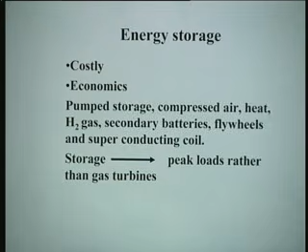And storage will come only during your peak loads, because at that time there may be a case where enough generation is not available. Sometimes using gas turbines may be a costlier option. I have already talked about gas turbines in an earlier lecture, and I told you why we need gas turbines. Though they are less efficient than a conventional steam power station, 30% as against 40%, they are quick starting. But here is a proposal that rather than starting a gas turbine, use your storage. The storage sometimes serves a better purpose to serve the peak loads rather than starting gas turbines. Of course, if you have both, you can always work out the economics.

Now, in case of secondary batteries, which is really the oldest way of storing energy, all your toys, your electronic goods, your transistors, 2-in-1s, Walkmans, calculators, everywhere you use batteries, and that is nothing but your energy source.

In fact, lead acid batteries were invented way back by a scientist called Plante in 1860, almost 30 years before electricity got generated in a bulk way by Edison, when the first bulb was lit. Electricity is a very old story. You must have known about ebonite glass rods and static electricity, you must have read it in your physics courses.

There are battery powered vehicles, I already talked about it. In our IDDC center, Professor Rukaswamy has done a lot of R&D on an electric bus. In fact, there is an electric bus service going on between Fatehpuri and Lal Killa, and that is just to make people aware how pollution can be avoided by using battery driven buses. So battery powered vehicles are available, they are running on the roads.

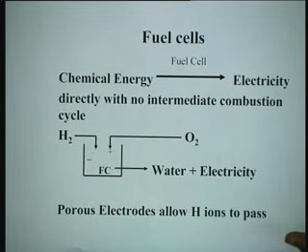Of course, fuel cells are costly, as I just mentioned. Anything in its initial years is always costly, but as time passes it becomes cheap. The same thing happened to color TV, the same thing happened to PC, the same is now happening to mobile phones. Even color prints, I remember when color photography came, used to be 7 rupees per copy, and now it must be very cheap.

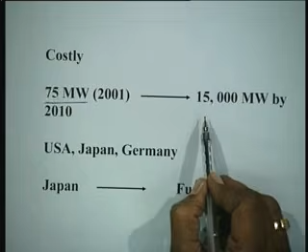Till 2001, the total power generated from fuel cells worldwide was just 75 megawatt, whereas it is envisaged it may become 15,000 megawatt by 2010. 2010 is not far off, and I am hoping that I will be around to see this 75 becoming 15,000 megawatt.

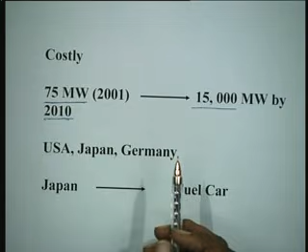These are the 3 countries in the world where fuel cell research is in the forefront, and hydrogen research also: Germany, Japan and USA. Barring Japan, there is no wind there, but US and Germany have wind as well, as I have been telling you earlier on.

Japan is the first to bring a fuel cell car, which I just told you about. We come back to hydrogen again. Hydrogen was used in fuel cells as well, as you have just seen. This is a medium for energy transmission and storage.

I was mentioning about the scooter. There are books on hydrogen in our center library. If you are getting interested in hydrogen, you can read them. At least there are books which contain a chapter on hydrogen energy that you can always use.

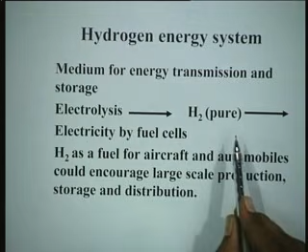Electrolysis will give you pure hydrogen, and of course fuel cells can be used. Hydrogen as a fuel is also used in aircraft and automobiles. I already told you about cars and scooters, and once it gets used, naturally it will prompt large scale production.

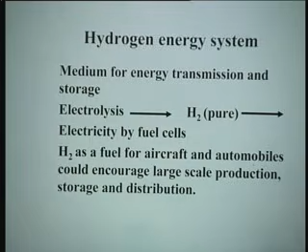There is a catch-22 situation here. Unless there is a use, nobody will produce, because it is a commercial venture. If you are producing something, it must get sold, otherwise why produce?

And there are problems of storage and distribution. You must have seen about LPG gas - if you do not handle it carefully, there have been explosions in various kitchens in the world, if it is leaking or not properly closed. So you have to be careful whether it is nuclear power, hydro power, or thermal power. There are precautions to be taken.

Now let us further study how the power systems grew in India, the growth of power systems in India. Of course, we are fairly rich in resources. You name a resource and it is available.

But the main problem is how to use them meaningfully, judiciously and optimally. You have talent, so where do you lack? You do not know how to channelize it, how to plan your things, how much you should study a particular subject, when you should study, whether you should get up early or work late at night. You have to plan your life. Every one of us plans our life.

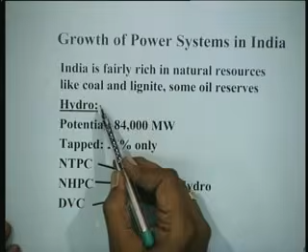As I already told you, the hydro potential in India is 84,000 megawatts. We could only tap 25% of it so far. There are reasons for that.

Now, the Government of India brought in the so-called Navratna public sector companies. NTPC, National Thermal Power Corporation, came in 1975. They used to employ at least 300 engineers in a year. I remember the interviews used to go on for a month in Nehru Place. Suddenly the requirement came down, and now it is looking up again, because we have to add 100,000 megawatts more. As I said, how do you add it if NTPC doesn't open new plants for power generation?

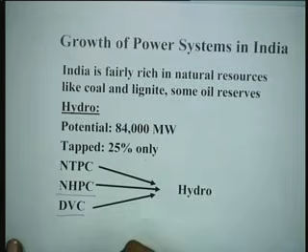Luckily, they have also entered hydro power in a big way now, so how long they can justify the name 'thermal' I do not know - it is no longer only thermal. Not forgetting that there is a separate corporation for hydro, NHPC, the National Hydro Power Corporation. Then there is DVC, Damodar Valley Corporation. Of course, Bhakra Authority is separate. All these are generating hydro power in our country.

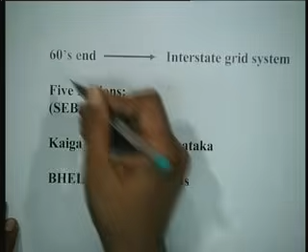I already told you that with freedom in 1947 we got only 1300 megawatt total installed capacity, which was nothing. Prior to that, during the British Raj, only a few pockets had electricity available, not much. With the first 5-year plan in '51, they started planning for generation, transmission and distribution. By the 1960s, say by 1970, the interstate grid system started. Till that time it was only state electricity boards - UP State Electricity Board, MP State Electricity Board - so power could not be given to a neighboring state even if you had surplus.

For long years Kerala used to have surplus power, because Kerala is a very small state and very rich in hydropower. If you travel in Kerala, you hardly find any space - there is water everywhere. So there is good irrigation, good water, and their economy is also good, because from every house someone is in the Middle East and someone is a nurse or in paramedical work. So they are all educated, 100% education.

So what does interstate grid mean? They can connect the states, and they produced 5 regions. Which were those 5 regions? I will just show you the map: NREB, SREB, WREB, Eastern Region Electricity Board, and Northeast. Northeast always gets special treatment because it is not so much developed. Now these SEBs, State Electricity Boards, got converted into REBs, Regional Electricity Boards.

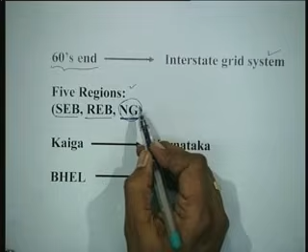Now the next step is, why not interconnect these regions? That is natural - if you have become a 4-figure salary earner, the next aim will be to become a 5-figure earner, and so on, if you can make further progress. We have been talking about a national grid since the 1980s, but already 25 years have passed and yet there is no national grid in place. However, these 5 regions are now loosely interconnected, so there is a possibility of power transfer among these various regions.

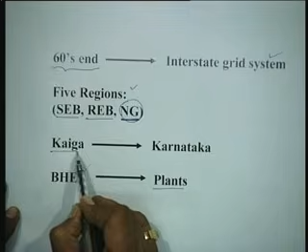BHEL is manufacturing power plants. Kaiga is the name of a nuclear power plant in Karnataka. BHEL is exporting power plants too. There was a time when we imported power plants from Germany, from Siemens, in the 70s. Now BHEL, amid stiff international competition, is able to get contracts for turnkey projects to start power generation in several countries around the world, including developed countries. Don't think it is only the developing world, because it works out cheaper, and in globalization, competition is the name of the game.

Eastern region: Orissa, Bengal, Bihar, and Northeast includes Assam, Arunachal Pradesh, Nagaland, etc. Western region is Maharashtra, Gujarat and MP, and of course now Chhattisgarh. The eastern region also contains Jharkhand, which I forgot to mention.

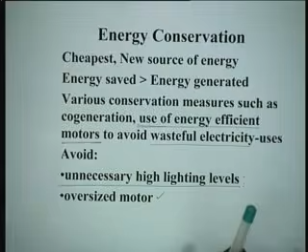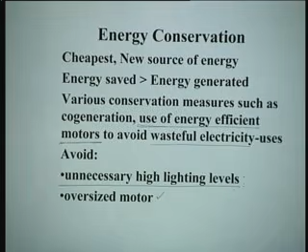Oversized motor. Selection of motors must have been a very important topic in your utilization of electric energy course, whether you are using Taylor's book, Wadhwa's book, Pratap's book, or Star's book. Every book has to talk about how to select a motor for a given purpose. Normally you tend to select an oversized motor thinking that in future there may be expansion.

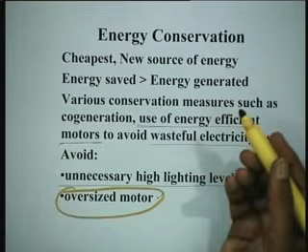Who knows when there will be expansion? It may be the other way around. You may not get business, you may have to cut down your production. Then it is happening in reverse - rather than expansion, you are going in the other direction. So this oversized motor which you have designed for a given purpose gives you further losses, and you all understand that sometimes working at full load is more efficient. You have drawn efficiency curves, and if you work at half load, just now we talked about energy efficient motors, and now you are yourself not using it correctly.

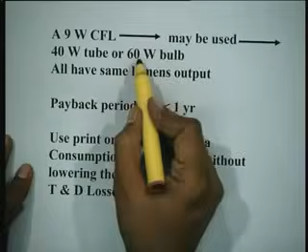I think all of you know that a 60 watt bulb, a 40 watt tube, and a 9 watt CFL - what is CFL? Compact fluorescent lamp. Even in trains nowadays you have a fluorescent lamp, even in houses. Where is 9 watt, where is 40 watt, and where is 60 watt? In fact this 40 watt is 54 watt if you consider the chokes and other things. So the energy consumption gets drastically reduced if you replace bulbs and tubes by CFLs.

Now there is a problem here. Of course all of them have the same lumen output. I am sure you must have done an illumination course in your undergraduate - luminous intensity, intensity of illumination and so on.

The problem is cost. A poor person may not afford it, but nowadays cost is coming down constantly. When it started it was 400 rupees, and with Chinese goods coming in, a CFL of the Chinese brand is 40 rupees. What is the payback period even if the cost is more? Hardly less than a year - in a few months you are able to recover that extra cost which you might have spent.

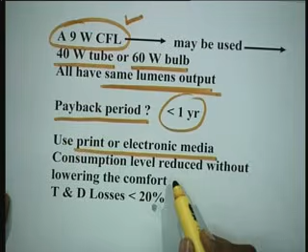Consumption level must be reduced. I have been talking about this, but without lowering the comfort. Don't become blind, don't have such a small bulb that you are not able to read. That is not the intention. The intention is you should be comfortable and yet you are not wasting energy. So there has to be an optimum mix, a judicious choice.

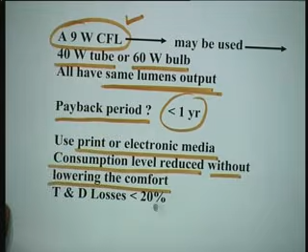T&D losses in our country are too high and they should be brought within a range of less than 20%. Imagine how much energy and power we can save if you can reduce these thefts. The metering is faulty. Even if you meter, there is no recovery, there is no billing. Even if you bill, bills do not reach the consumer. Even if it reaches, consumers do not pay. Even if they pay, they pay less. So these are the problems we are facing in our country.

Use technology. So technology is normally misused. In yesterday's TV program, they were showing how just by making an ISD call, you can have a bomb blast anywhere in the world. The circuit gets connected just by making a call. So why is technology being used for bad purposes? Why not for good purposes?

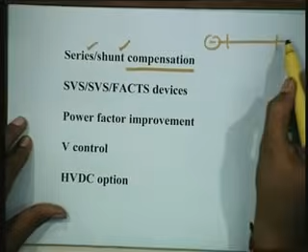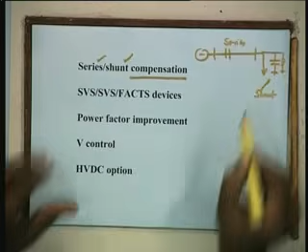There is a compensation, series and shunt, you might have read already. Just by investing a few rupees, if you can save several hundred, several thousand, why not? The compensation is either series or shunt. This is a transmission line, this is the load, either have a shunt capacitor or a shunt inductor, or you can have a capacitor here. This is series and this is shunt. What is the cost? Just the cost of a capacitor, and it will improve three in one, as I said the other day. The power factor gets improved, the efficiency goes up, and of course voltage control gets better, the regulation is better.

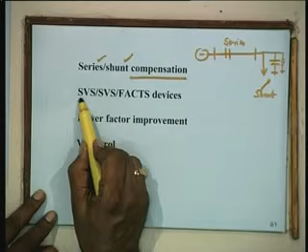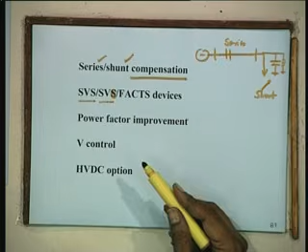So this SVS, static VAR system, static VAR control, SVC should be the static VAR compensator, FACTS devices, power factor improvement, voltage control, HVDC option wherever possible. You should go for HVDC. In our country now, as I told you, from northeast to south, there is a 2000 megawatt corridor they have created for HVDC. Another use of HVDC is of course the asynchronous link, back to back connection, which is there in Satpura and so many other places.

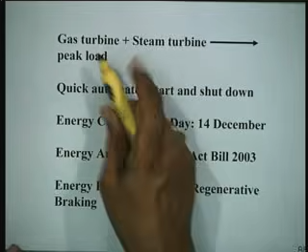So you can have a combination of gas turbine and steam turbine, combined cycle. The gas turbine is used for peak load and steam turbine for normal load. Quick automated start and shut down is possible with gas turbines.

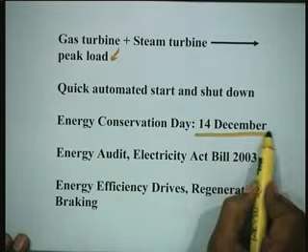We do celebrate several days in our country - Children's Day on 14th November, Sadbhavana Divas, Anti-Terrorism Day. We also celebrate Energy Conservation Day on 14th of December every year. But this day should be celebrated in such a way that you make people more and more aware of what this energy conservation is about. Energy audit, there is the Electricity Act Bill 2003. How many people talk on this bill? They talk on women reservation or SC, ST or OBC, but the media is not interested in talking on the Electricity Act Bill which was passed - hardly any panel discussion or anything on this particular bill.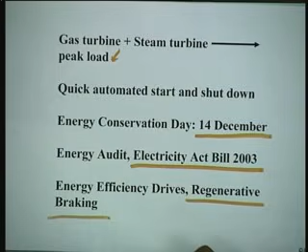Energy efficiency drives regenerative braking. I am sure you must have read about braking in your undergraduate - plugging, rheostatic braking and regenerative braking. In traction, electric trains, we have perhaps the biggest railway network in the world, and our terrain is not so smooth throughout India, we have ups and downs. So whenever we are going down the hill, we should use regenerative braking, like coming from Shimla to Kalka, and you can save a lot of power.

Talking about the sun, the solar, I told you that we have 270 sunny days, use it for bath and kitchen. What did I tell you about our forefathers - they used to keep a bucket of water outside and take bath, whereas we use a geyser. We forget that the geyser is on, we go and watch TV, read newspapers, even take breakfast, and the geyser is still on.

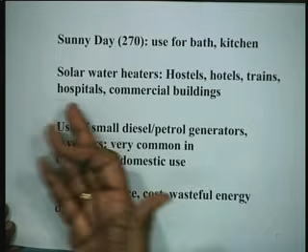I think I have told you already about solar water heaters in hostels and hotels. Are you aware that in Shivalik Hostel the Energy Center has put in a solar water heater there? You should go and see that. You may ask me, what do you do with the solar water heater in summer? Well, wash your utensils in the mess rather than cleaning them with cold water. Hygiene is always a question mark, so it will be better if you wash those utensils with hot water, which is available free of cost in summer days. Similarly, I told you about hospitals and commercial buildings and so on.

Now, the inverters we use have gone up. Do you realize most of us have only 2-room set houses, barsatis? Even you are facing the music now, having 3 students in 1 room. Where is the space to move even? You may not be having this problem, but undergraduate students do have to stay like that, in an IP hostel or somewhere. I was told even in the warden's house some 16 girls have been put, in Kailash, is it right?

So, space is a problem. And then if you have an inverter, I am sure you can't sleep in that space, in the room where you put it. If you put it outside the house, tomorrow you may not find it. So you have to put it inside the house, and whichever room you put it in, since the fumes come, the gases come, there is acid, I do not think you should sleep there.

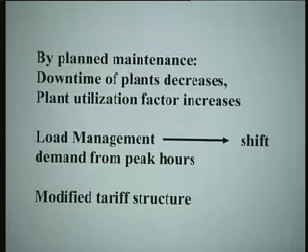So now I will request you to have any few questions or clarifications or suggestions on whatever we have covered today. Do you have any? So, by downtime of plants we mean the repairing time?

No, downtime means when the plant is not available for generation, and of course that includes the time of repair also, because while repairing also the plant is not available, and it depends on how much time you take to call the repair team if you do not have one. Sometimes you may not have in-house staff, because now it is an era of outsourcing. That is what the US has started doing - it has started giving their problems to India rather than calling Indians there. They found it cheaper, that is why our security is also outsourcing. Everything will be outsourcing nowadays, because then you do not have to spend that much money - they are not your employees.

Any other question? Sir, what are these energy efficient motors? Well, energy efficient motors will have better cooling, better insulation. That is why they are costlier, because you are putting in effort so that the losses get minimized. There is no other magic that just by calling them energy efficient motors they will have more efficiency. That means you have to change the design, and it itself is a very important and fascinating topic. Please read any modern machines books, maybe PC Sen or maybe Fitzgerald's 6th edition, even our machines book - I do not know whether you are aware, it also now talks in more detail about energy efficient motors.